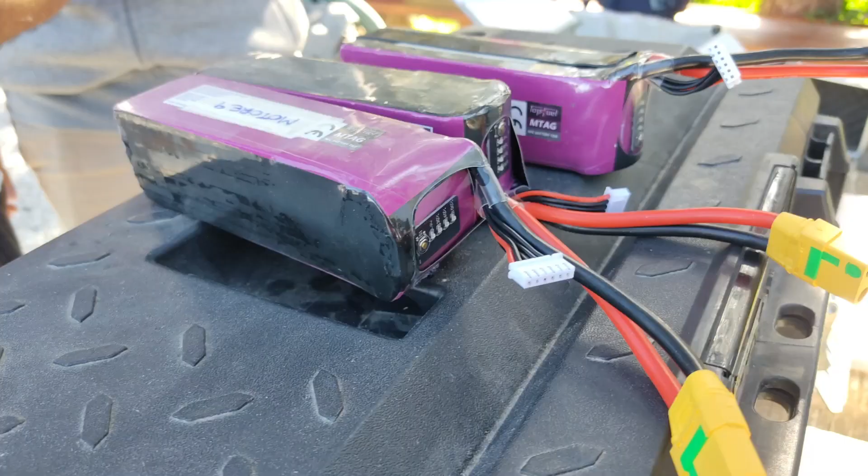AENEA has been designed in order to participate in SUAS 2023. It has a flight range of 15 miles at fully loaded weight, which is 37.5 pounds, thanks to a 10S2P LEVO battery propulsion pack. It's able to perform agile maneuvers with a turn radius of less than 70 feet, with a cruise speed of 22 meters per second, and to take off and land on a 250 feet runway.

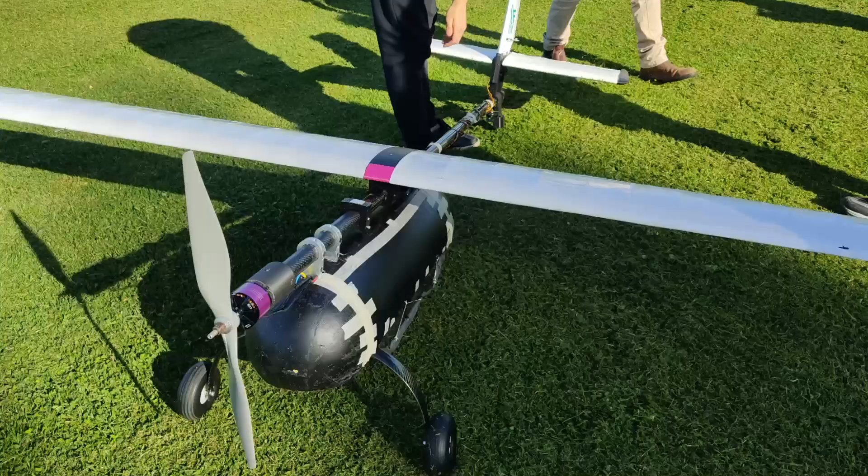The UAV is capable of accomplishing a set of missions by keeping high safety and reliability levels, as well as high-precision autonomous flying. A multidisciplinary optimization approach was necessary to complete the design of the system. This was based on time and budget constraints, team experience, workforce, and available means.

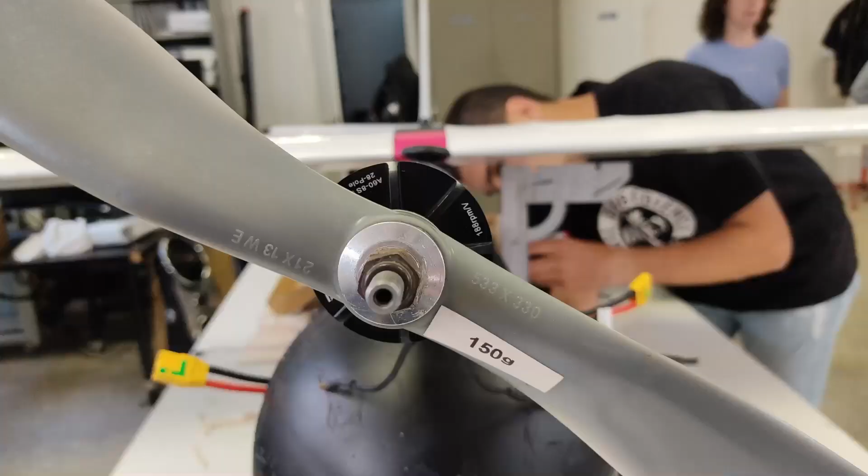AENEA is a high-wing electric propeller engine aircraft, driven by a team-developed autopilot installed on an onboard computer designed and tailored specifically for the team's autopilot. The Jetson nanocomputer is used to run the artificial intelligence for the ODLC. Allowing communication between the autopilot and the artificial intelligence allows the airdrop mechanism to correctly spot and reach the ground targets with the payloads.

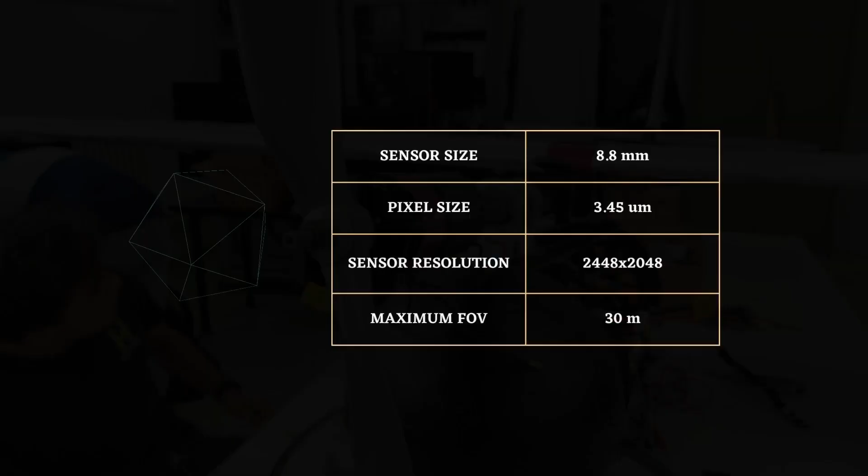The image acquisition setup is made up of a 5-megapixel IMX264 global shutter sensor with 12mm non-distortion lenses. This setup ensures a resolution of 10mm per pixel at the cruising altitude and a wide horizontal field of view. 120 targets in different lighting conditions and working distances have been tested to find the perfect parameters for the camera, for which a custom image acquisition script was developed.

White balancing and exposure are controlled by the software to ensure dynamic color accuracy and maximum performance of the object detection system. Once a photo has been captured and geotagged with the position of acquisition, through serial communication with the flight management system, it is then processed by the object detection pipeline running on the NVIDIA Jetson Xavier.

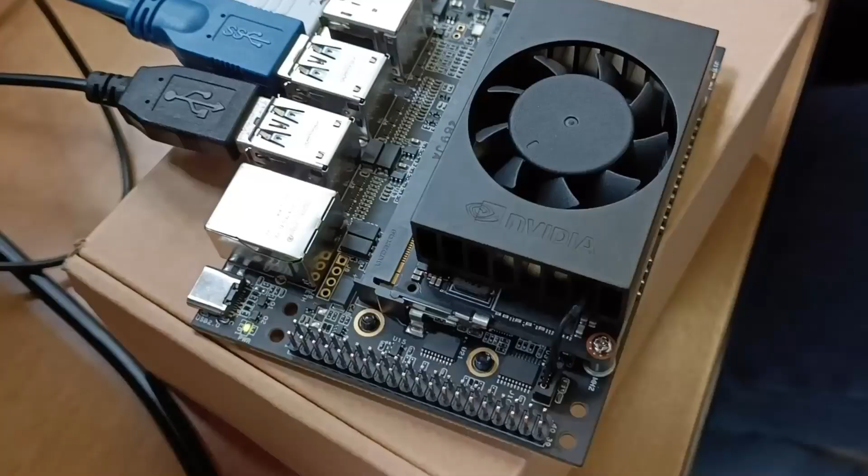The first phase of detection is an attention layer, responsible for highlighting and cropping the areas of the image that have a higher possibility of containing objects different from the background through a combination of filters from the OpenCV2 library. The following step is the shape detection, accomplished by an object detection neural network trained on a real dataset, extended with several techniques of data augmentation.

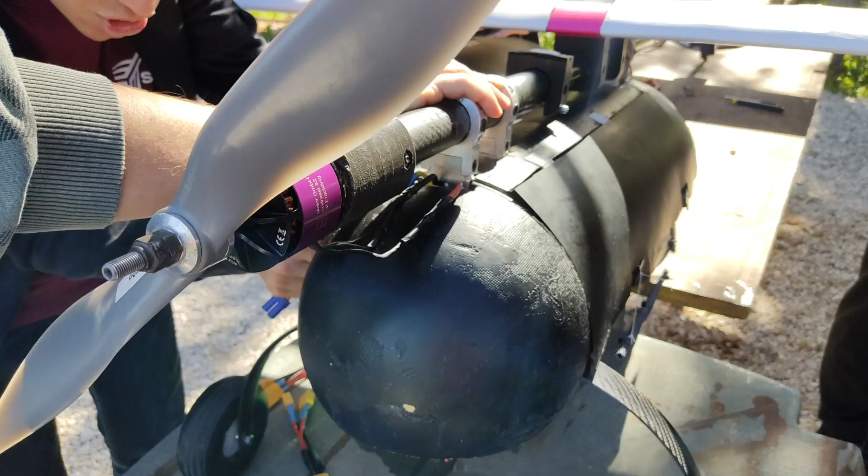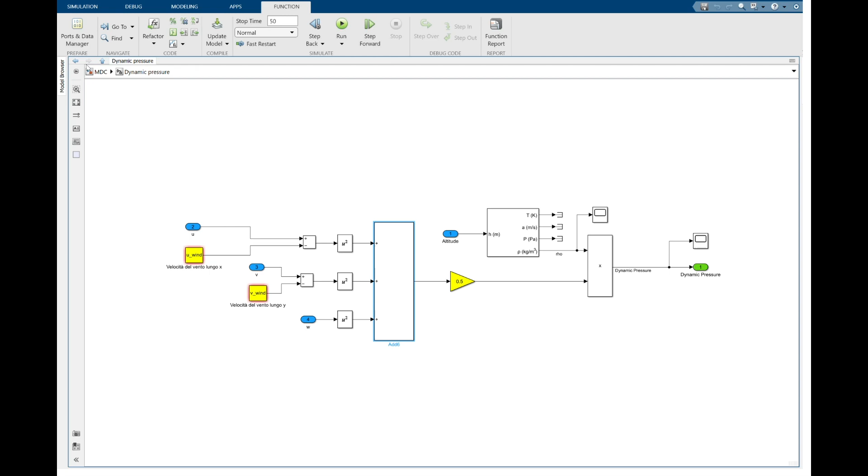Character detection is carried out by a scene-text recognition network assembled by the team, trained on a dataset of 10,000 standard character photos. Gathering these 4 layers of information, a decision system chooses which of the recognized objects are most similar to the objective targets, and their GPS coordinates are given to the drop algorithm. The drop algorithm simulates the payload's trajectory and provides to the autopilot the necessary coordinates and orientation to land them on the correct ground targets.

Payload is housed on the outer skin of the fuselage to keep unchanged the internal positioning of all the electronics. Fuselage is shaped to have 5 bottle-like indentations where the payload will be distributed and lodged, in order not to alter significantly the UAV's aerodynamics.

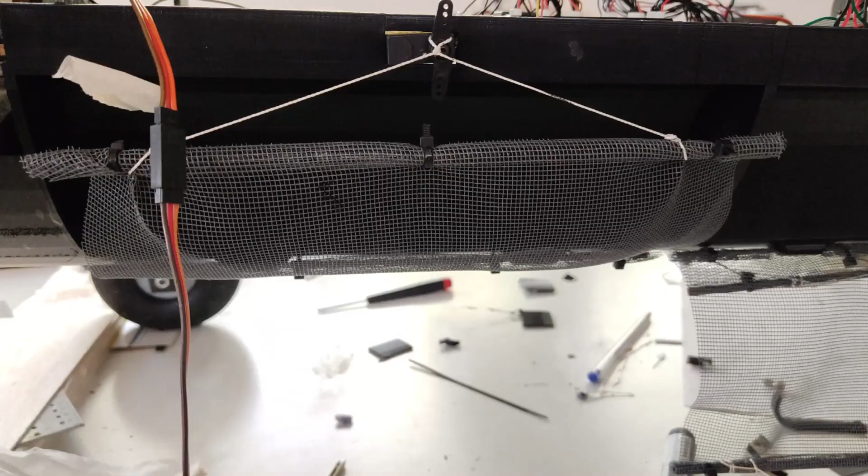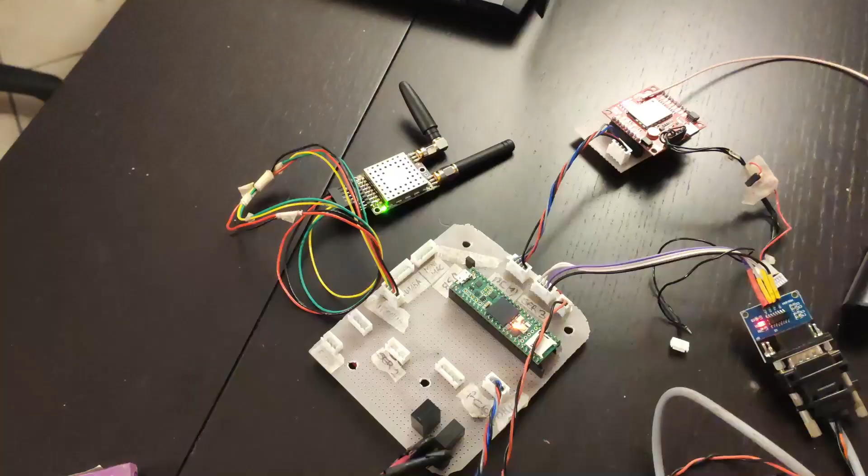The communication system between UAV and ground control station consists of a couple of omnidirectional antennas connected with 2 RFD900X US modules that allow the exchange of telemetry data and actions on the autopilot. The ground antenna is mounted on a fixed tripod near the ground control station. The use of RFD900X US modules allows maintaining a reliable and constant data link during the entire length of the mission. Furthermore, they are FAA standards compliant.

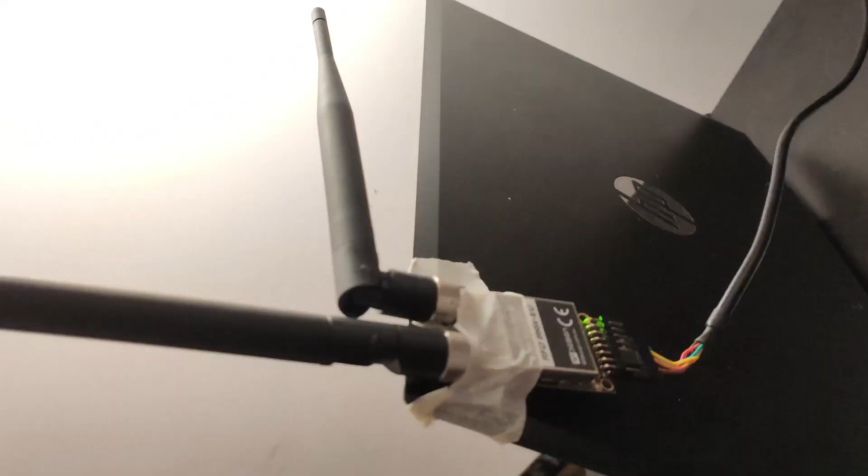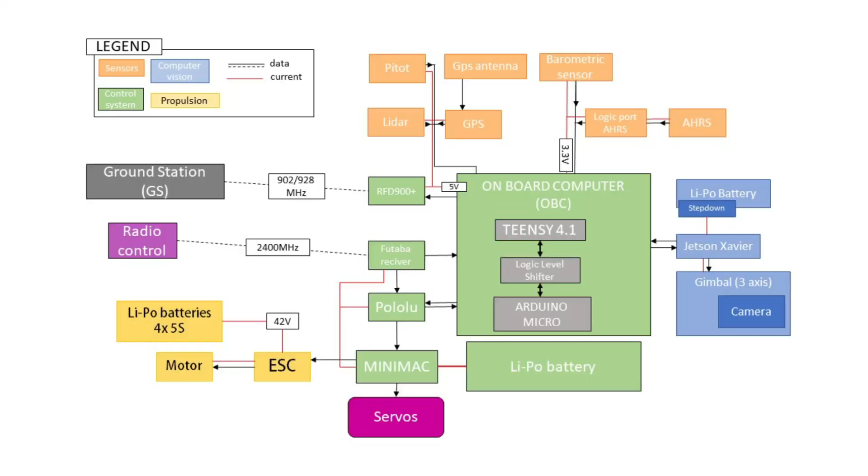Data transmission is realized through the MAVLink communication protocol. The omnidirectional antennas are characterized by a 20 dB gain, which guarantees a range up to 40 km. For safety issues, there is also a second link via Futaba 2.4 GHz protocol transmitter that connects the ground station with the drone that is activated in case of critical failures of the autopilot system. The secondary link connects a remote controller manned by the safety pilots.

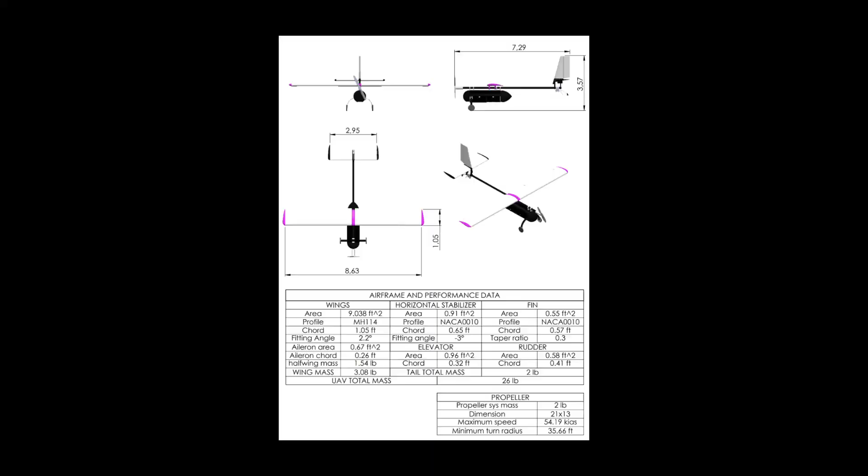AENEA is a high-wing electric propeller engine aircraft. A fixed-wing airframe was chosen as the final part of a project of an academic career path based on fixed-wing aircrafts, and, moreover, the autopilot, entirely designed by the team, is based on a flight dynamics mathematical model for fixed-wing aircrafts. The UAV is designed around a central carbon fiber boom and to be completely modular.

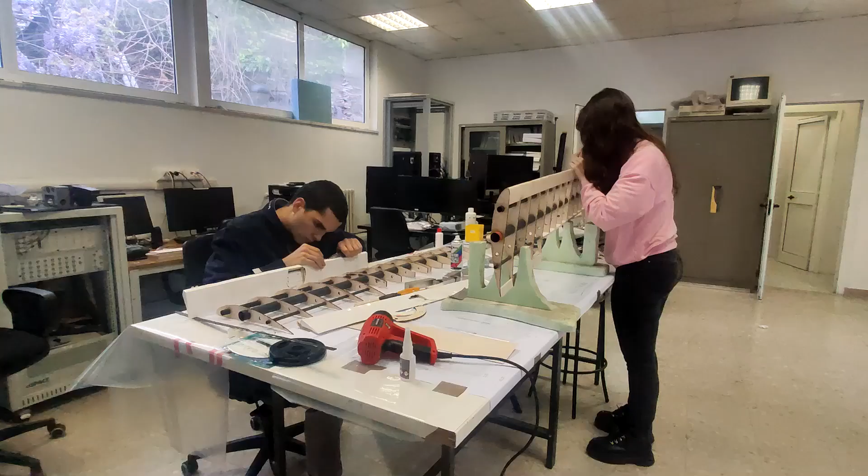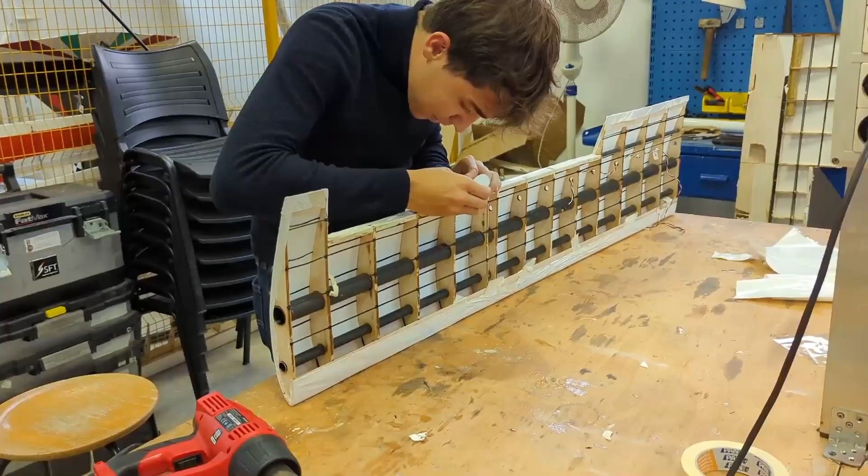Each component of the aircraft was firstly modeled using CAD softwares like SolidWorks and Autodesk, working then on the mechanical assembly. For the internal wing structure, it was decided to use a traditional model aircraft configuration of balsa wood ribs and two wing-long carbon fiber booms for bending stresses. Optimal diameters for the booms were chosen to guarantee torsional stiffness, maintaining lightness. There is also a smaller third wing boom that provides support to the wing before the aileron area. The wings are attached to the main boom with a bayonet fitting mechanism.

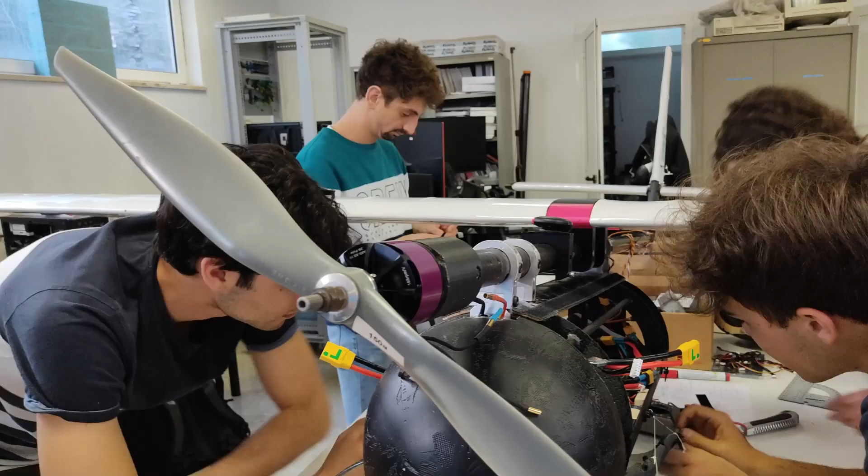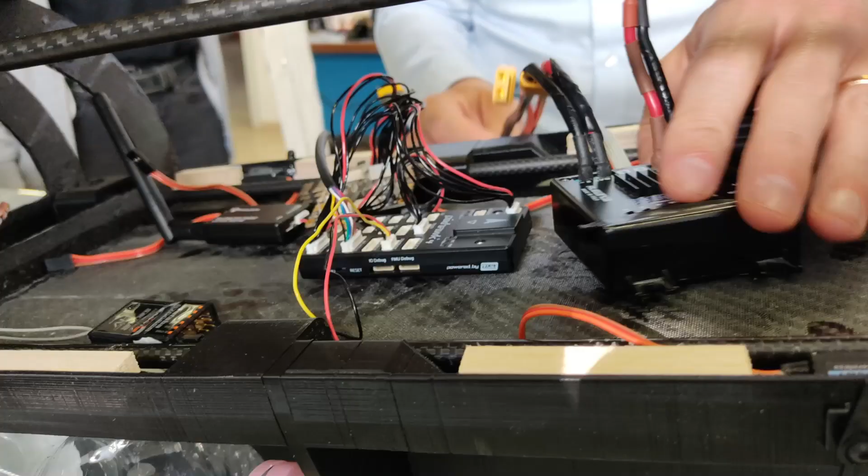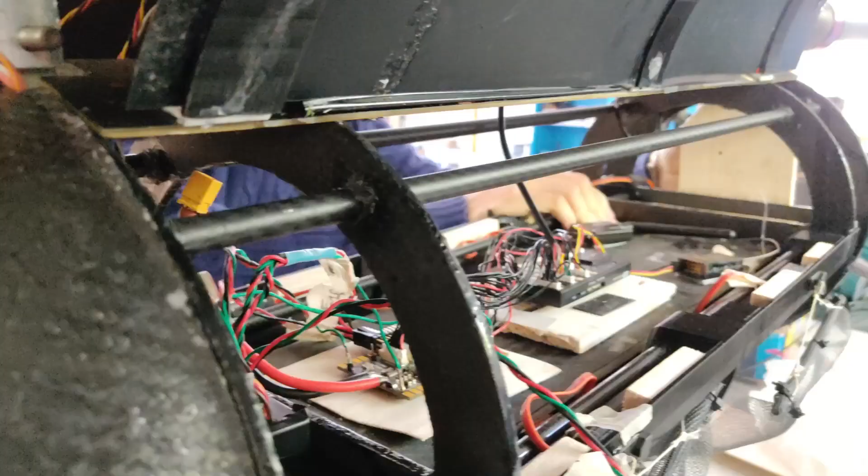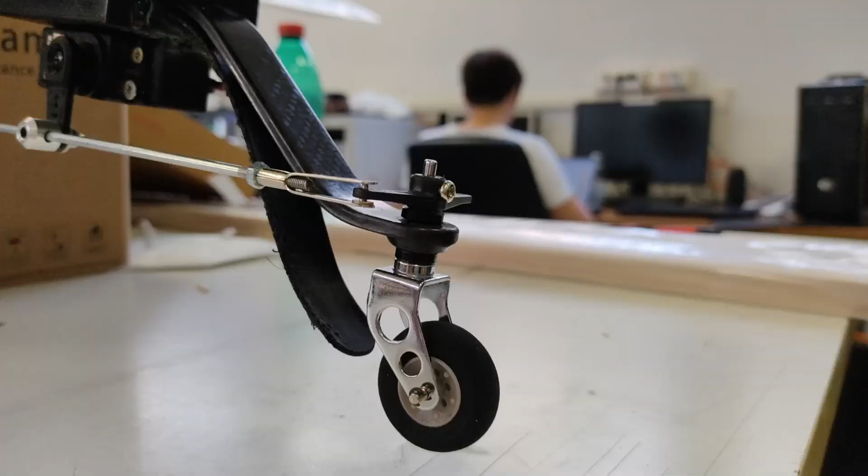The back nose cone is also made of carbon composite, while the front nose cone is made with Kevlar composite and plaster. These elements are designed and manufactured to properly store batteries and camera inside. For the fuselage cage, since the lower part will hold the payload, the structure was 3D printed using PLA as material to guarantee good load housing, stiffness, and a light structure. The upper part of the fuselage cage has no load supply, so it was opted for an extremely lightweight vinyl sheet. It was decided to use a tailwheel type landing gear that guarantees no interference with the airdrop system, easy taxi operations, and more housing room inside the fuselage.

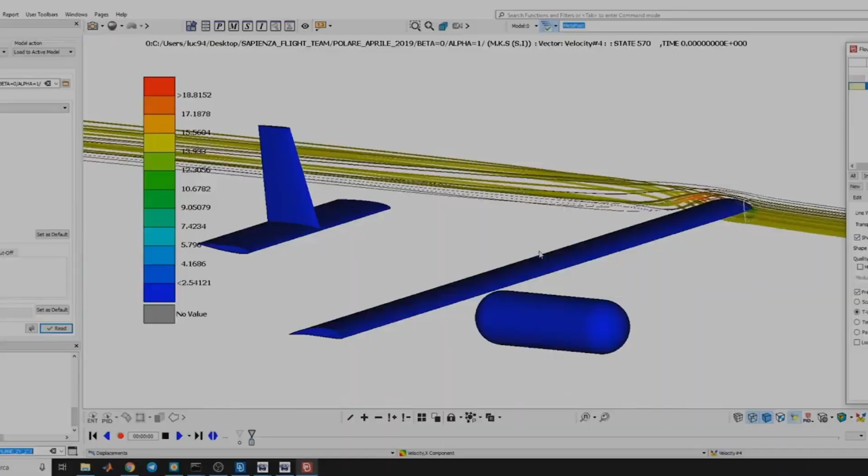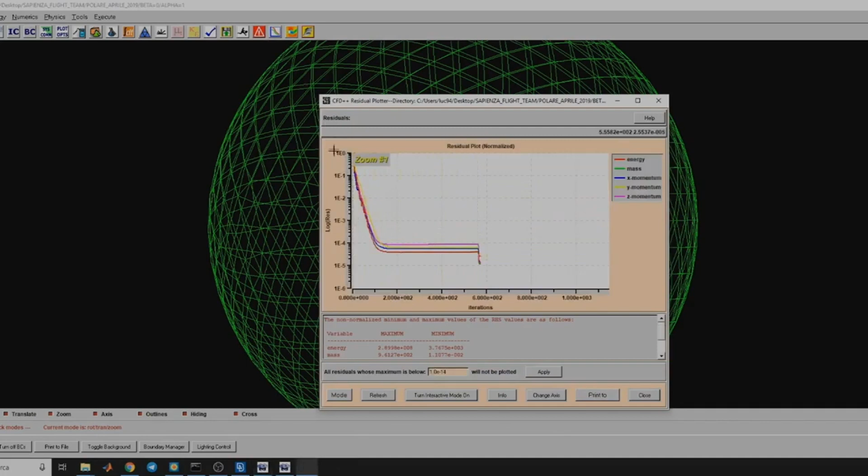CFD simulations were used to solve the flow field with the aim of computing main aerodynamic characteristics of the drone. A simplified model was used and imported in the software ANSA by BETA CAE, where a spheric domain and a computational mesh were created. To execute the fluid dynamic simulations, the chosen software was CFD++. To compute stability derivatives and control derivatives, AVL was used, an open-source software which solves, through a potential method, the aerodynamic flow around an object. Loading the geometric model and a lumped distribution mass file, it was possible to execute the trim case and the main derivatives in order to feed the autopilot.

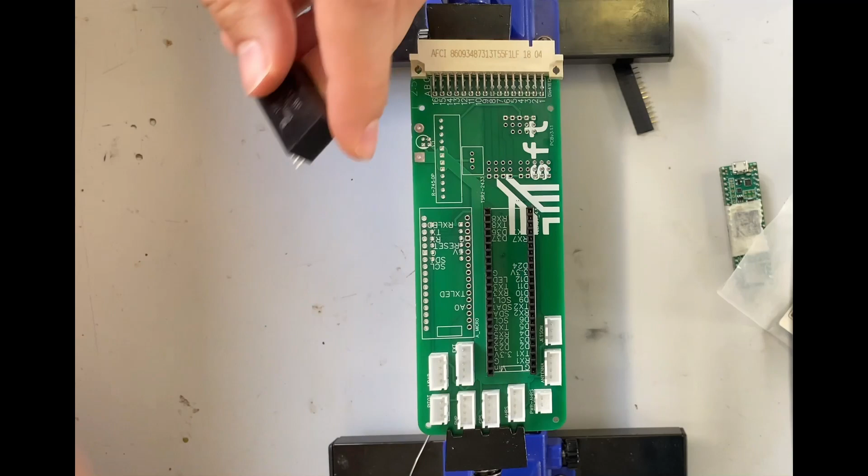A PCB has been designed and developed to enable easy integration between the used controllers and their respective sensors. Through the printed circuit board, the Teensy 4.1 and Arduino Micro efficiently interface with the sensors, managing the information flow and allowing the autopilot to take reliable and well-informed decisions.

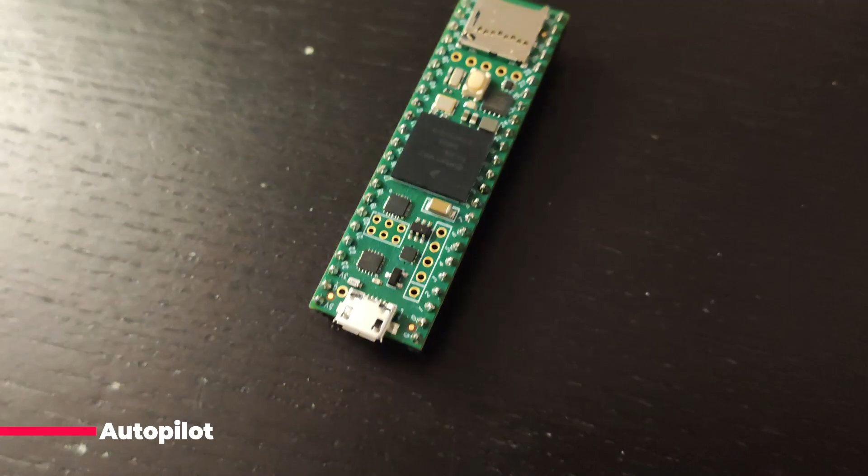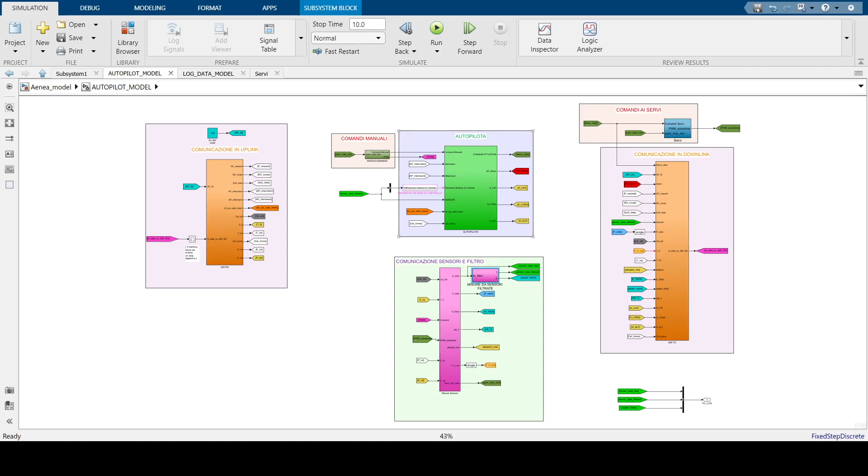AENEA's autopilot has been entirely implemented by the team students on MATLAB Simulink and installed on a Teensy 4.1 board. It includes a Kalman filter for the sensor's measurements, two blocks that allow the uplink and downlink communication with the ground station via MAVLink protocol, a Stateflow for the switch between manual and automatic guide, managing also critical situations that require the go-home mode or the safety pilot intervention, and finally the external control loops for altitude, velocity and heading, and the internal ones for throttle and roll, pitch, yaw angles.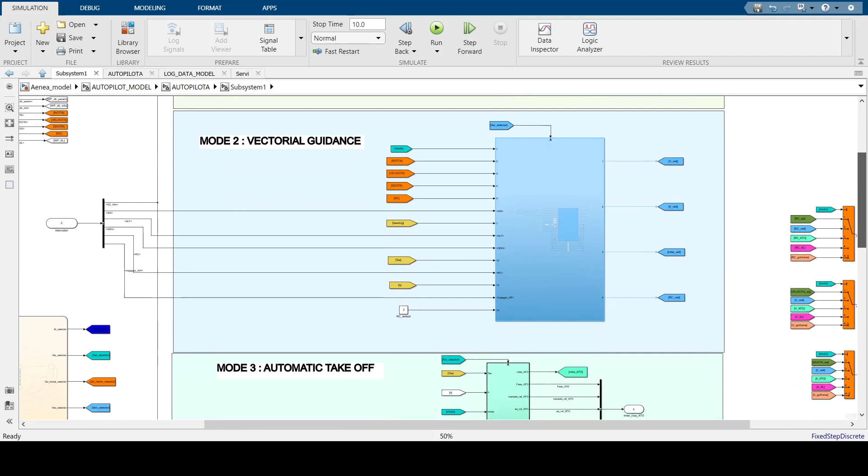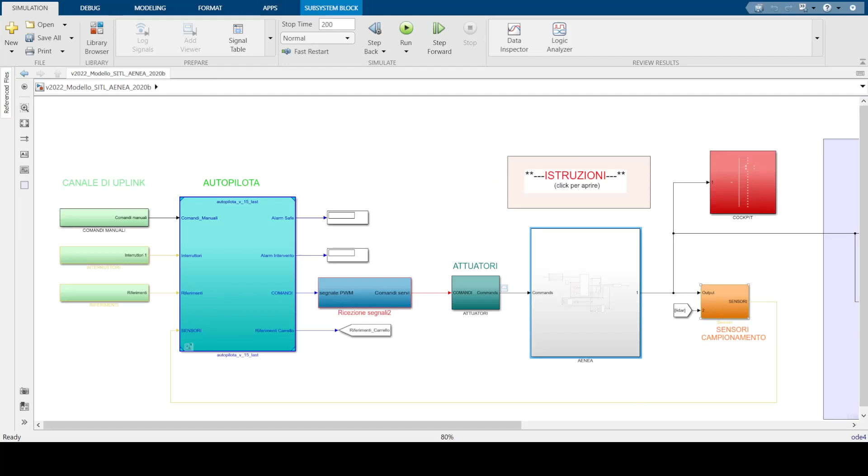The flight management system has 5 autonomous features. Fly by waypoints: through the software, AENEA is able to follow a given 3D waypoint trajectory. Vectorial guidance: this mode allows the drone to follow a trajectory with previously assigned altitude, climb rate, velocity and heading. Automatic takeoff and automatic landing, return to land and flight termination. The activation logic of these two modes is signal and battery dependent, as specified in the competition rules. Once engaged, the RTL mode leads the drone to the selected position, then switches to automatic or manual landing. The flight termination mode forces the aircraft in the following setup: throttle closed, full up elevator, full right rudder, full right aileron.

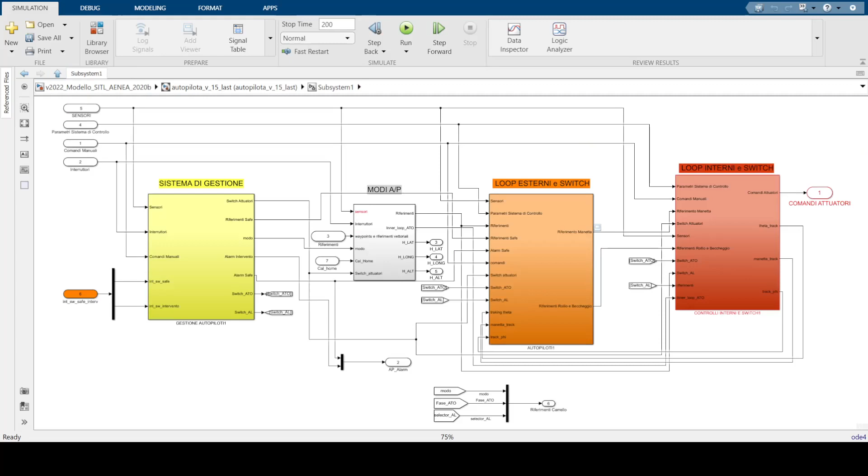The ground station consists of one laptop used as interface with aircraft and radio modems with their antennas. The front-end interface is QGroundControl that displays the mission plan and performs telemetry and data logging. Besides, it provides setup and control functionalities and it's compatible with both the team's software and Pixhawk, used as a backup system.

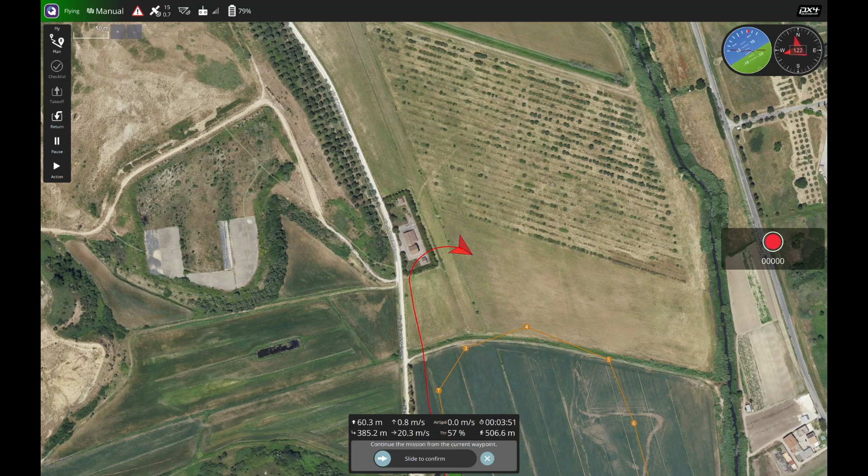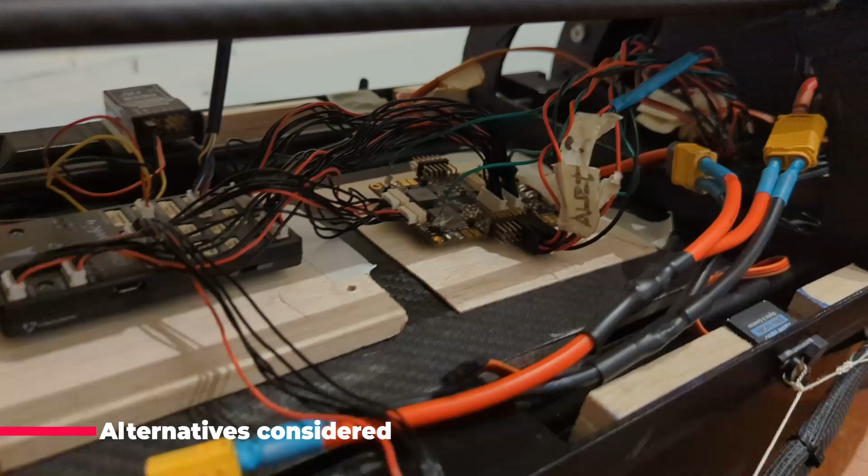In order to avoid any collision with objects or other UAVs during the competition flight, the safety pilot will constantly monitor this possible situation in order to switch, in case of danger, from automatic to manual flight, avoiding in this way any collision. Among the alternatives considered regarding the autopilot, a Pixhawk 4 board has been configured with PX4 autopilot. This allowed to test and verify the custom-developed autopilot as a backup system.

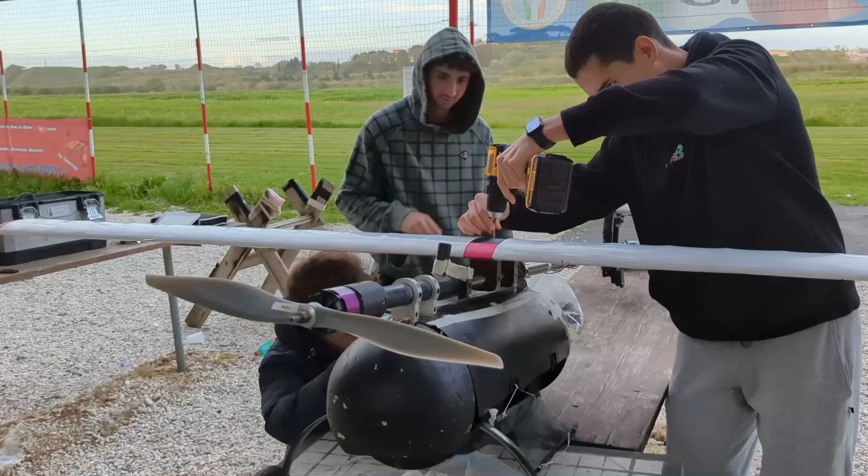Regarding the propulsion system, the 1614 propeller has been discarded due to worse efficiency and longer runway required due to lower thrust, estimated during bench and flight tests. Besides, previously it was considered the usage of a Sony Alpha 6000 camera. The choice has ultimately preferred the current sensor because of the latter's higher color fidelity, better acquisition rate, and ease of use with software control.

YOLO seemed the ideal choice for the task. However, it did not perform optimally in terms of object detection with the dataset. This led to the option of using the computer vision neural network offered by RoboFlow, which was already the team's choice for storing and expanding the dataset.

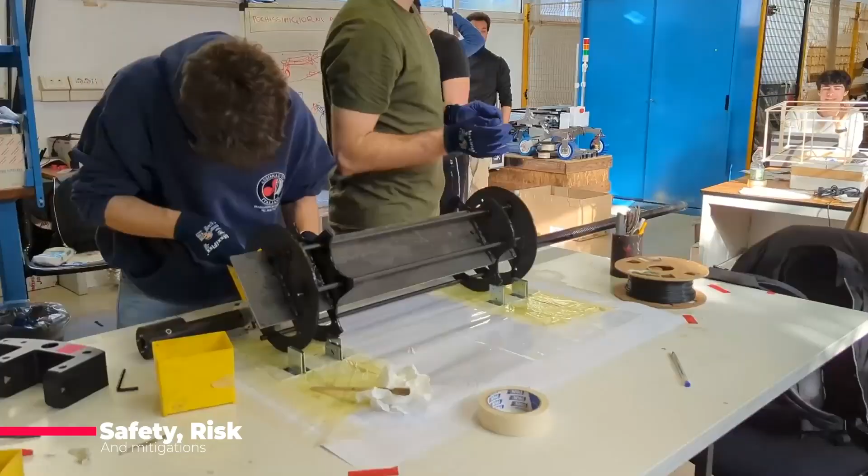Safety is essential for the entire team's success and security. To minimize or eliminate risks for team members and vehicle components, several safety constraints have been put in place, and all team members have been provided with safety courses and equipment to minimize manufacturing, process, and testing injury.

One of the most critical parts of the mission that have been analyzed and tested during this year, due to the frame configuration of the aircraft, is the payload deployment. In fact, to ensure the correct parachute deployment sequence during flight and eliminate every possibility of interference with the aircraft undercarriage, a tail dragger configuration has been chosen as compared to the tricycle gear.

Different aircraft designs have been examined, and to avoid delays during the testing campaign in case of components failure or accident, multiple backup instances of every component have been manufactured thanks to detailed economic and working planning in advance. After training on the provided augmented dataset, the neural network has achieved a good accuracy, both in detection and classification.

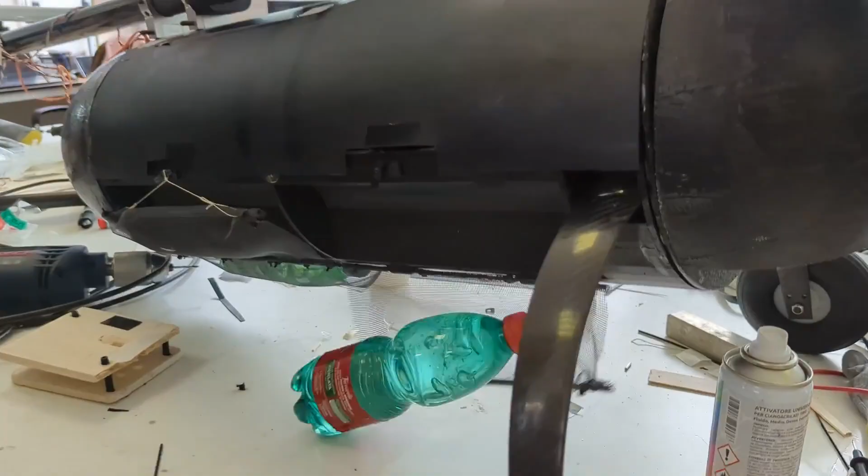First land tests have been performed to test the dropping mechanism and parachute performance. Then manual drops have been accomplished while flying to test the accuracy of the fall path prediction. Given the good precision of the fall prediction model, the attention focused on autonomous air drops performed by the autopilot, with all calculations performed on the Jetson.

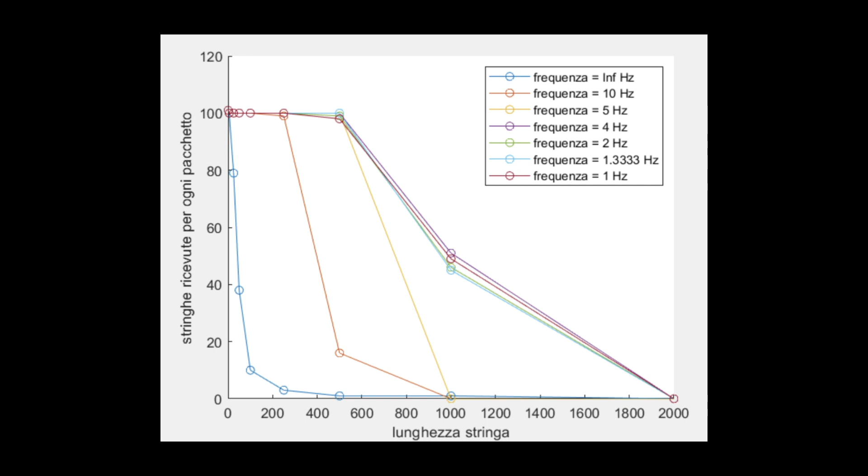All the tests for the RFD900X module's performances were made in a suitable location, far from buildings and signal interferences. The used evaluation metrics are the RSSI, Received Signal Strength Indicator, and the number of received packets. Both of them can be measured using the RFD tool software. Different trials have been made with different values of data rates, transmitted power for the local radio, and distances.

After more than 10 cumulative flight hours, it's possible to affirm that the UAV is safely capable of satisfying all requirements for flight performances demanded by the SUAS rules. It has also been tested in either manual or autonomous with extremely high wind conditions with good results.

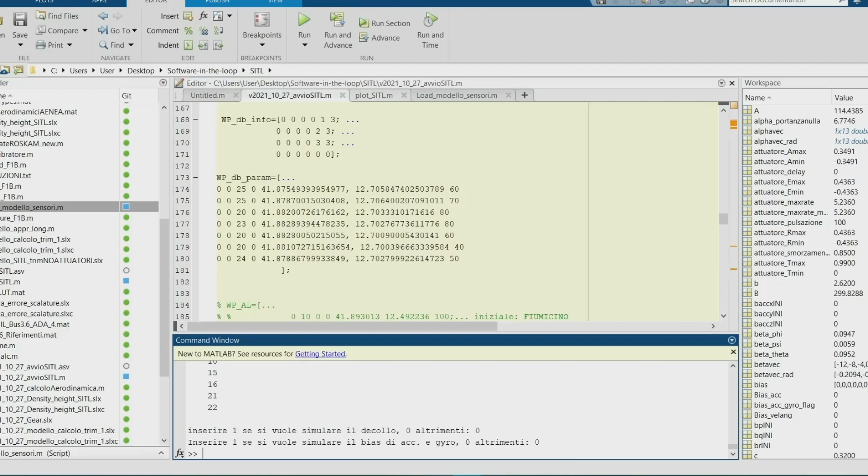To tune and safely test the autopilot control loops and modes, a parallel Simulink model dedicated to the software-in-the-loop simulation was developed. This includes a sophisticated mathematical model of the aircraft, blocks that simulate the sensors' output, including noises, blocks that simulate the actuators' action, aerodynamic surfaces and throttle, and the autopilot itself. It is possible to simulate all 5 flight conditions foreseen by the autopilot.

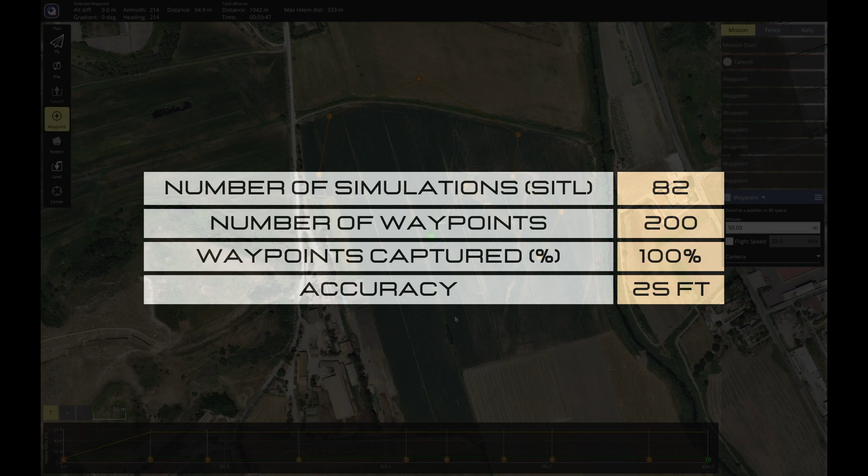In particular, for the autonomous flight, the software-in-the-loop simulation allows to set the desired waypoints in the startup file, together with all the parameters of the whole Simulink model. At the end of the simulation run, it is possible to display the path followed by the aircraft along the waypoints, and several simulations have been carried out entering waypoints inside the airfield in order to foresee AENEA's real behavior and to understand which order of distances it is able to manage.

The autopilot was tested in real time for 30 flights for a total of 5 hours. All tests regard autonomous flight with waypoint navigation and automatic takeoff and landing. The flight stability was tested by missions that were planned from the ground station by imposing the desired waypoints via QGroundControl, and the flight turned out to be in accordance with the software-in-the-loop simulation. In order to further verify the developed autopilot, the same missions were carried out also using Pixhawk.

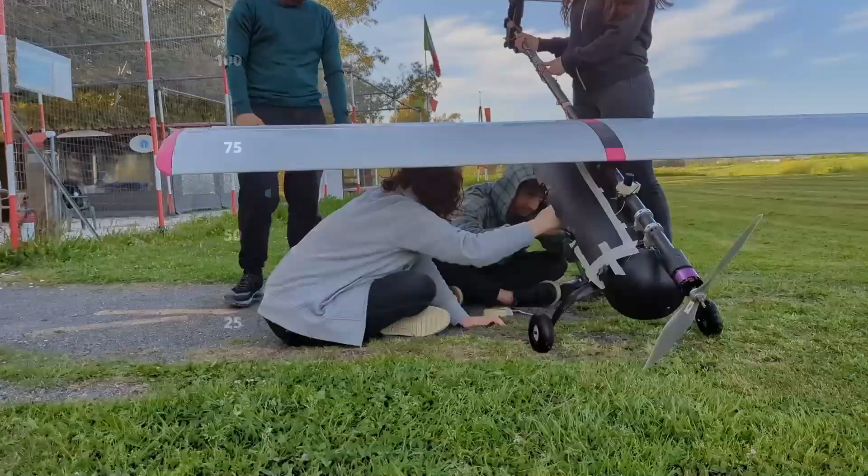The obstacle avoidance is carried out in manual flight. During the tests, the safety pilot has switched from automatic to manual flight to perform a possible maneuver in order to avoid a collision, with 100% success. To ensure a perfect mission result, 14 full missions have been tested with encouraging results, showing that the competition members are gaining experience and coordination with time.

The team captain starts a 10 minute configuration timer, and every competition member initiates his assigned procedures following an accurate checklist. Once the setup is terminated and after the pre-mission brief, the aircraft is carried to the runway and the ground control station operator, coordinating using a handheld transceiver with the safety pilot, gives the takeoff command. After the mission, the aircraft returns to the tent in order to begin the tear-down procedures.